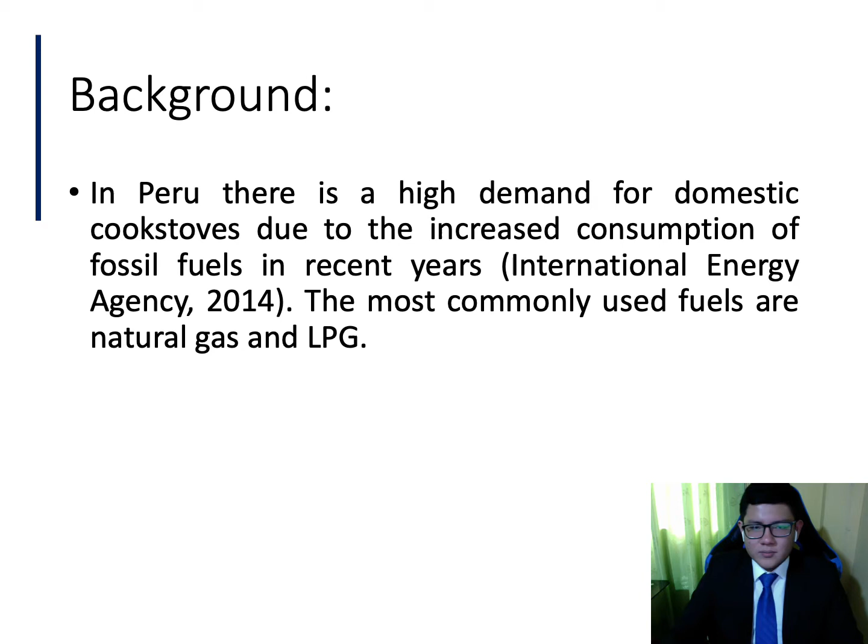Over the last few years, there has been a progressive increase in the consumption of fossil fuels, up to approximately 80%, according to the International Energy Agency. This has directly affected Peru, where there is a high demand for domestic stoves, the most used being LPG and natural gas. So the problem is focused on the high levels of contamination that Peru has due to the emission of pollutants.

The Peruvian market today offers different types of cookers with different types of burners. However, the characteristics of the power delivered by the stoves through the fuels used are not specified. This represents a problem because we don't know how much the power supply is, and the consumption of the fuel.

The industrial kitchens offered in the Peruvian market have low thermal efficiency, approximately 40% to 50% or less, and this is not indicated in their technical data. This can be seen in the yellow color of the flame due to bad combustion, which as a result consumes more fuel than it should. So it's important to focus on that problem.

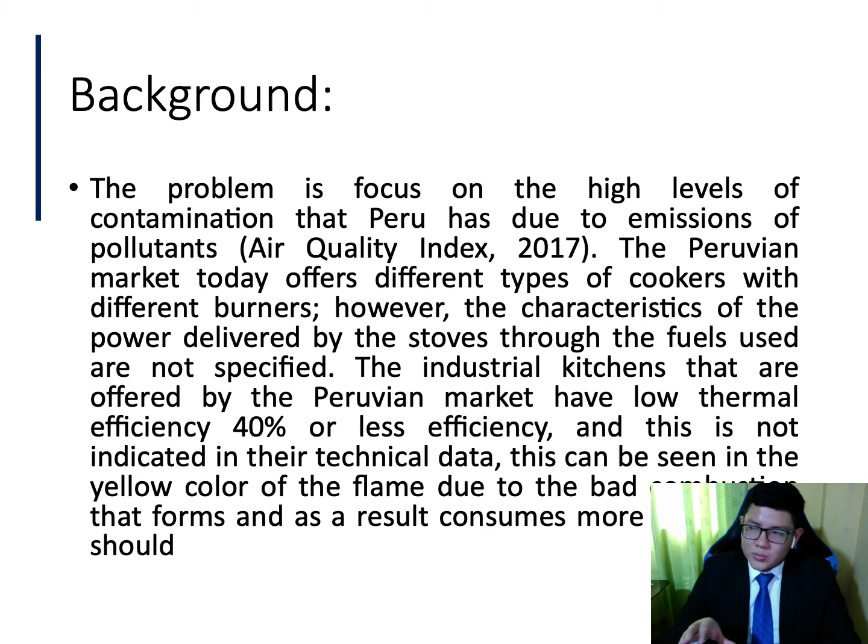For that reason, we made this investigation with the objectives of designing and making an experimental evaluation of a new industrial burner design, operating at a pressure of 23 millibars, based on improving thermal efficiency with variation in geometric parameters. So we made a new geometric design of an industrial burner.

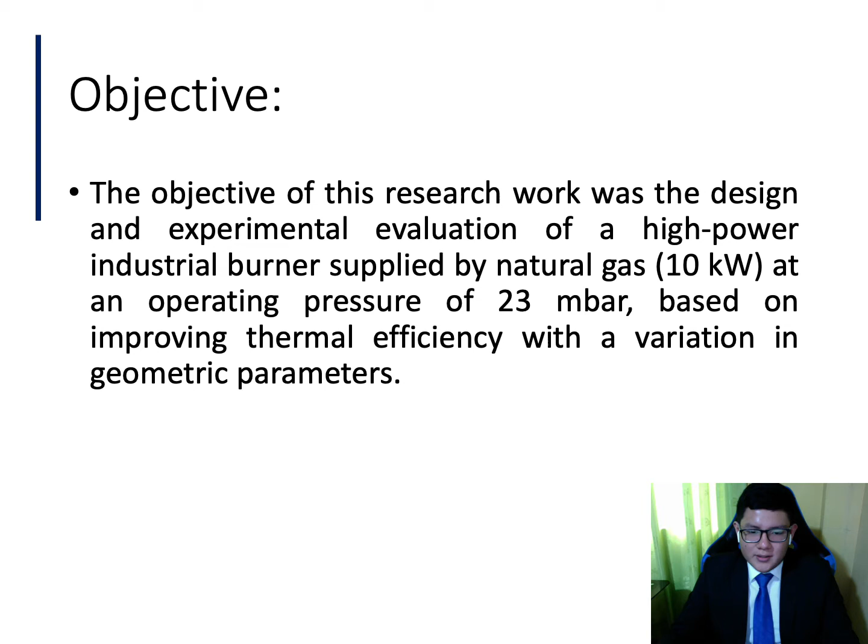In this picture we can see a scheme of the test carried out on the test bench. In the lower part we can see the burner: the burner head, the mixer, and the injector with the fuel supply. This was the load height, and the pot. This pot had 32 centimeters of diameter, according to the norm.

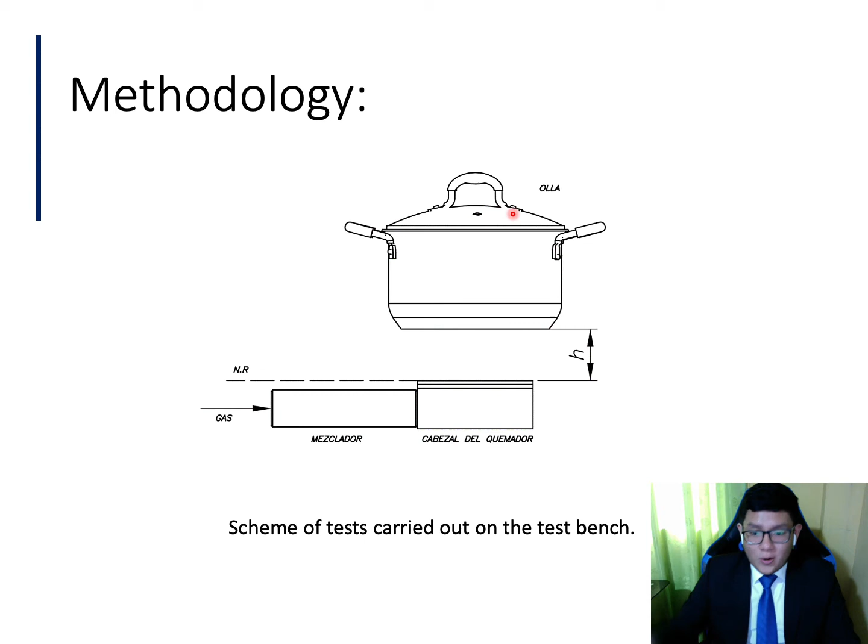For the investigation, the norm NTE INEN 2259:2013 was used to calculate the thermal efficiency. This is an Ecuadorian norm. These are the constants we have to use in the test bench, all the values of the variables. As you can see, the water mass that we used was 11.4 kilograms.

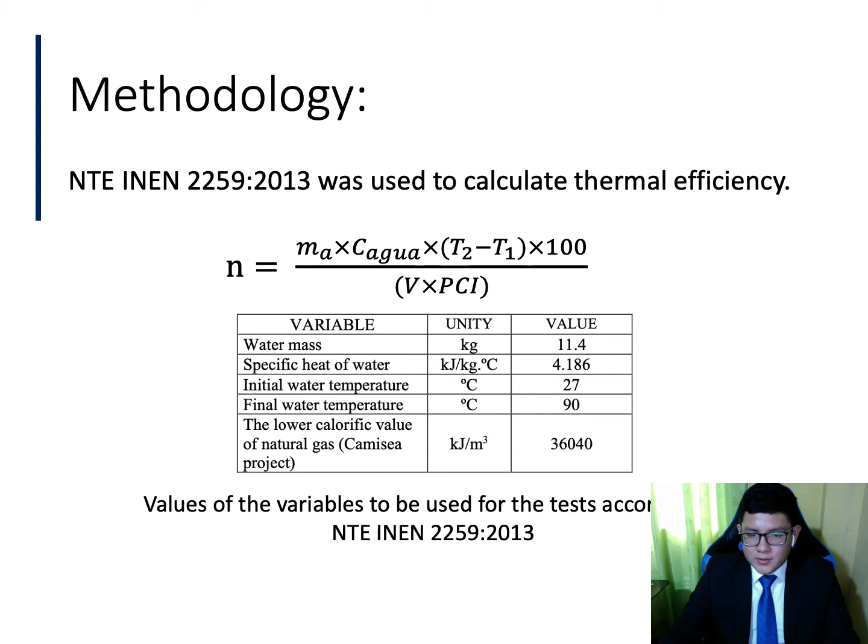In this picture, we can see the scheme of the test bench in the laboratory. This is the three-part burner: the first part, the second part, and the third part. This is the mixer and the injector: the first injector, the second, and the third one.

In this case, we can see the flow meter for the fuel, and this is the pressure regulator, to have a pressure of 23 millibar at each injector. That's it.

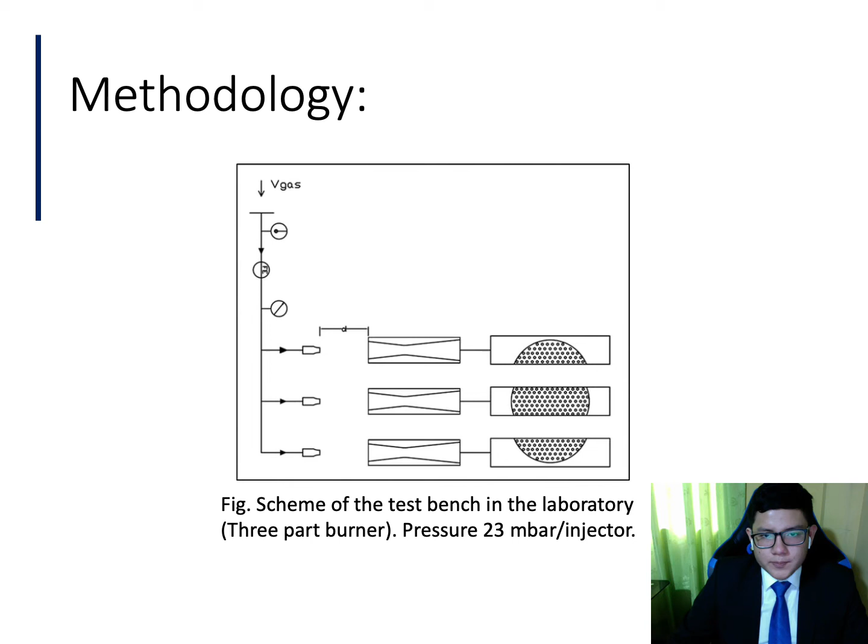At the first step we have the injector design. We had to set the power value; it was 10 kilowatts. And the lower calorific value, since we used natural gas, is a constant. With both, we could calculate the mass flow of the fuel gas.

For the development of the injector design calculation, it was based on the paper

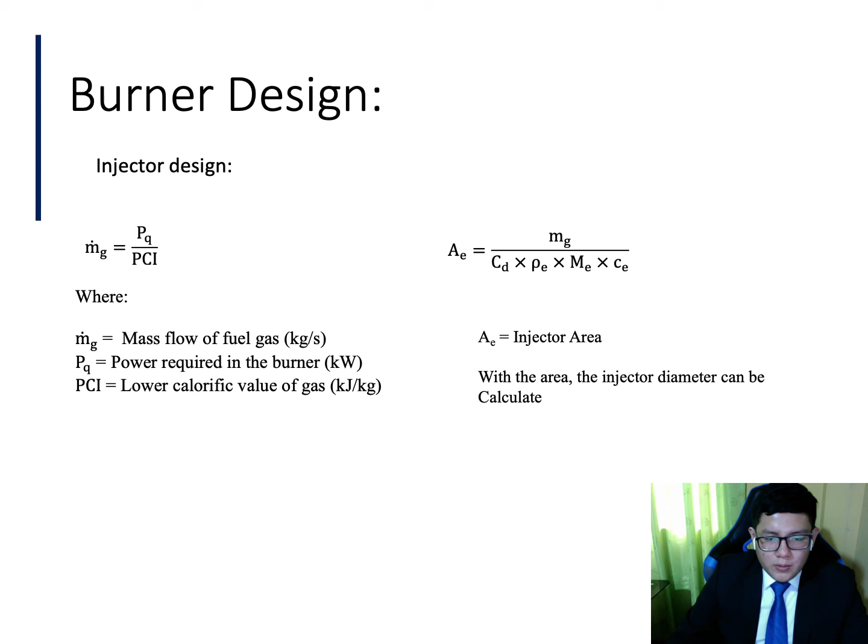You can find it in the bibliography of the paper. In the last part, we have the injector area, and using the circle area, we can calculate the injector diameter.

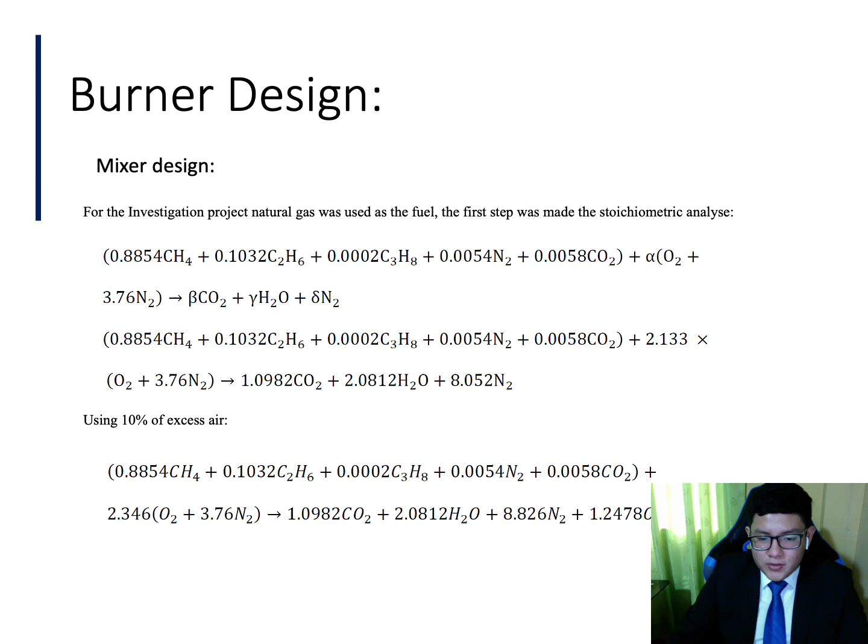This investigation involves the combustion process, so that's why we made the stoichiometric analysis with natural gas. Using 10% excess air, we obtain this stoichiometric balance in the case of natural gas.

It was also important to know the volumetric air-fuel relationship. Using the recommendation of the biogas stove design by Dr. David Fulford, we can calculate this using 50% of the total air required. And the diameter of the Venturi mixer was determined by the formula we can see in this part. All of this calculation was for the mixer design.

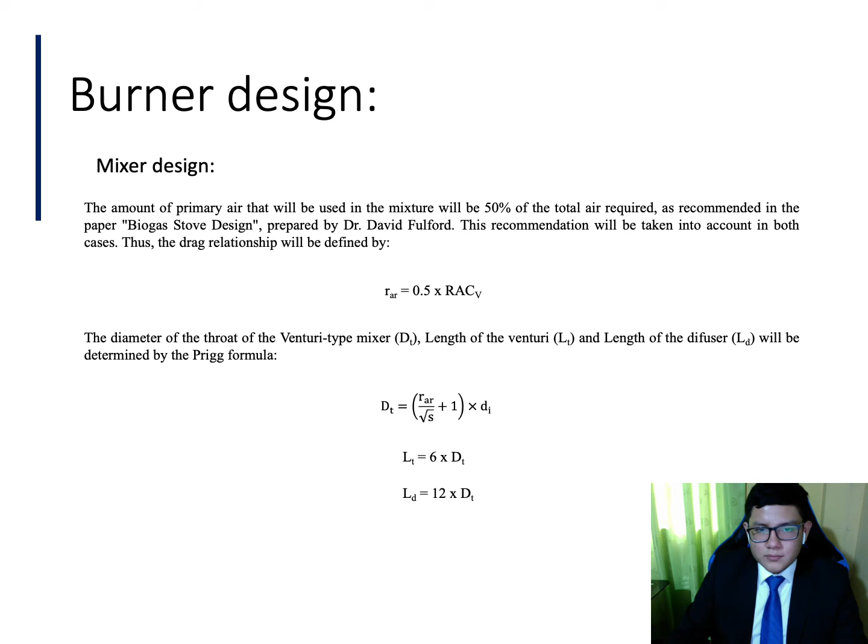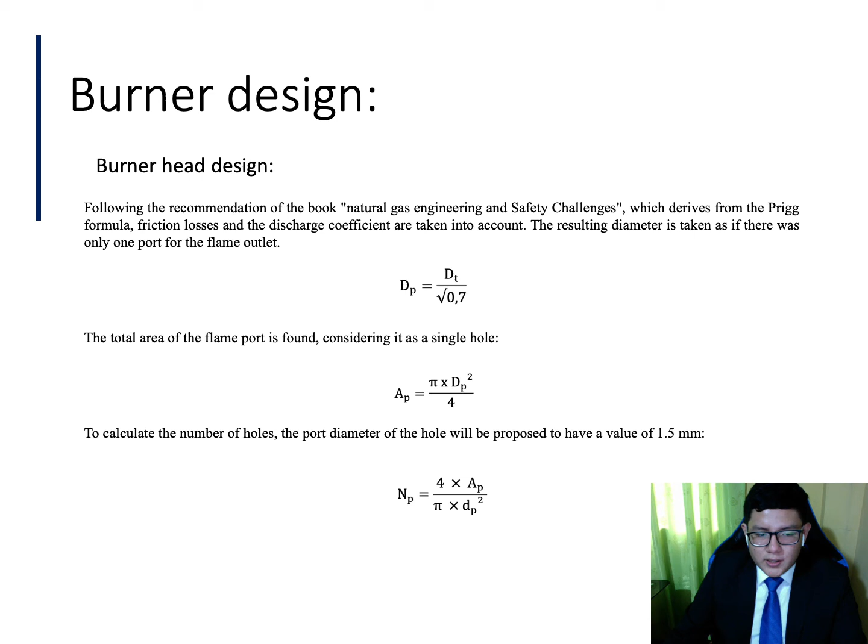Finally, we used the book Natural Gas Engineering and Safety Challenges, with a derivative of the formula, for the burner head design. We can calculate the flame port with the formula, the area, and the number of holes the burner needs. We set 1.5 millimeters as the hole diameter, and with that we can calculate the number of holes. This is for the final design.

These are the results of the investigation. In this table we can see the preliminary test results. They are preliminary because we couldn't continue the investigation due to the pandemic situation. There were 8 tests. The thermal efficiency averaged 30%, which is low efficiency, but it's a higher power burner, at 10 kilowatts. That's why the efficiency is lower.

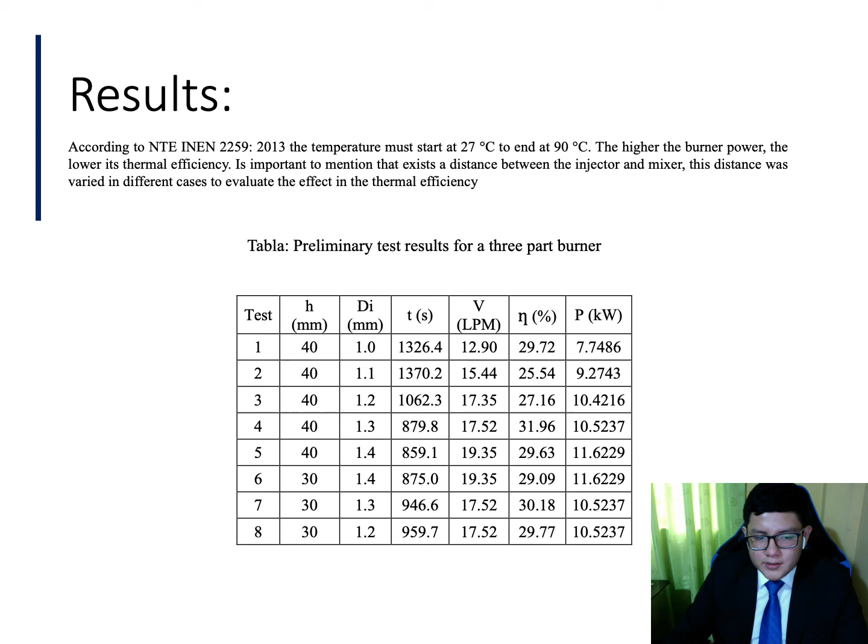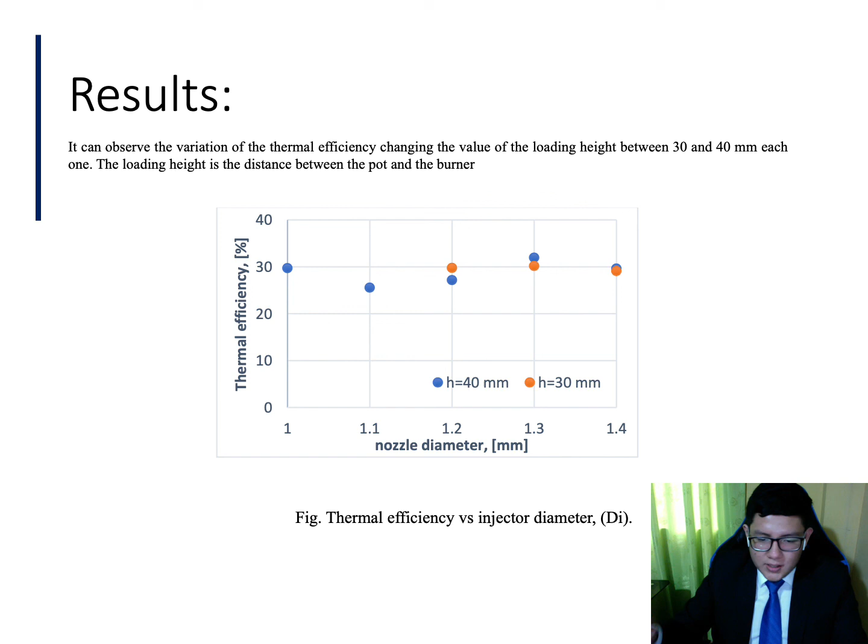In this picture we can see the variation of thermal efficiency per each injector diameter: 1 millimeter, 1.1, 1.2, and so on. What's the difference? It's the load height, the height between the pot and the burner. Here the height was 40 millimeters, and here it was 30 millimeters. That is the difference in the variation of the thermal efficiency.

The conclusions: there exists a relationship between the thermal efficiency and the burner power. The higher the burner power, the lower the thermal efficiency. If we want to increase thermal efficiency, it's necessary to work with cooking burners that have lower power. As a result, the efficiency would be higher, and with higher efficiency we obtain lower gas emissions and better combustion because the air-fuel mixture will be the best.

About the test conditions, the diameter of the pot was 32 centimeters because the norm said that. And the thermal efficiency is more constant when the loading height is 30 millimeters. Also, the thermal efficiency is higher by 2%.